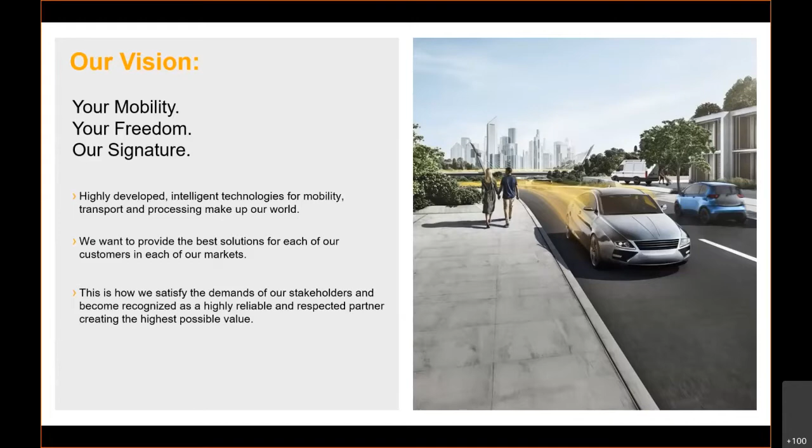I would like to start with Continental first. Continental has a vision: your mobility, your freedom, and our signature. Highly developed intelligent technologies for mobility, transport, and processing make up the world. We want to provide the best solution for each of our customers in each of our markets, and this is how we satisfy the demand of our stakeholders and become recognized as a highly reliable and respected partner, creating the highest possible value. That is our vision.

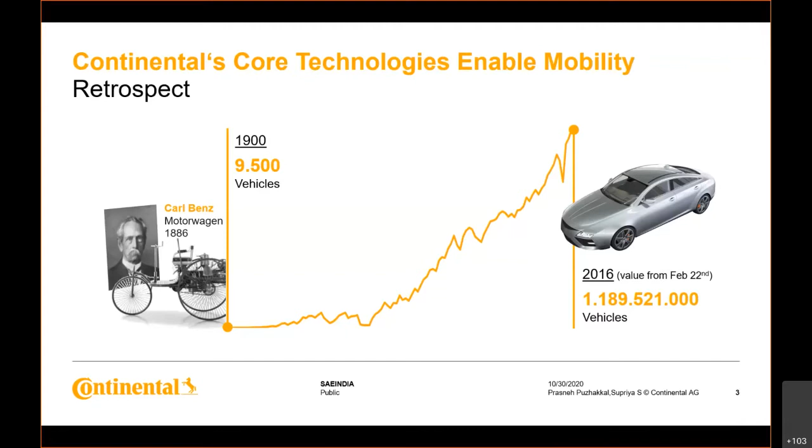Let us look into Continental's core technologies enabling mobility, with a short retrospect. From 1886 to 2016 - 1886 was the first motor wagon, the first car produced by Carl Benz. In 1900 there were only 9,500 vehicles all over the world. Now in 2016, you can see the numbers here. So we could say individual mobility is a success story.

Let us see whether individual mobility will be a success for the future. What are the pros and cons? The pros: we have fun in driving, we have private space - especially in the time of Corona, we don't want social contact, so it ensures a private space. It ensures the freedom to drive. What are the cons? Pollution is one biggest problem. Boredom is a problem, waste of time, stress, crashes.

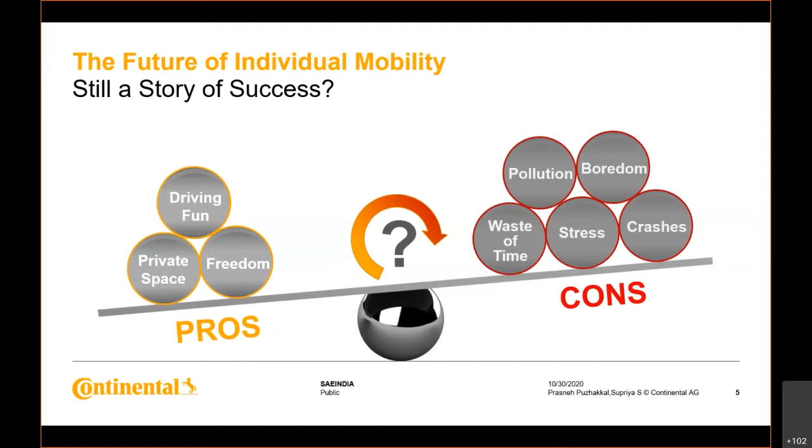So now we are talking more about safety. Let us talk about the crashes. The future of individual mobility can be a success story by looking into these figures: 1.25 million traffic accident fatalities worldwide, and it is expected to increase. The United Nations goal of the decade of road safety is to save 5 million lives, and this is what we are going ahead with.

So there is a motivation behind moving for the safety system. We have to reduce these fatalities for the future.

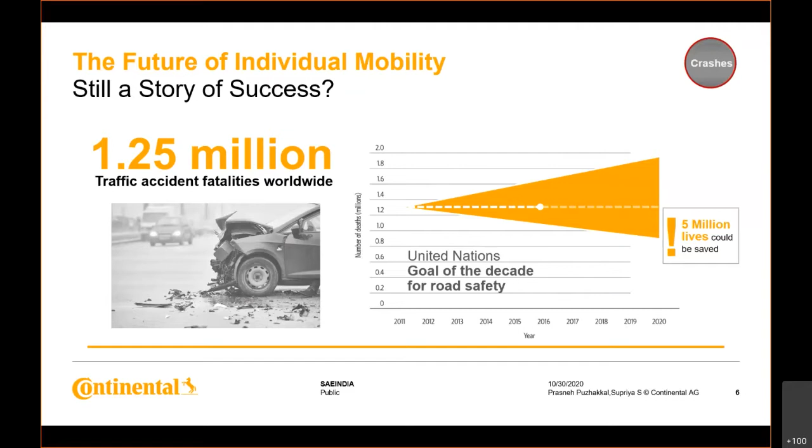Let's talk about safety - reduce the number of fatalities and those injured. 1.25 million people die in road accidents every year, and a further 50 million are getting injured. When you look into 9.3, 19.9, 17.3 - these are the statistics from all the worldwide regions.

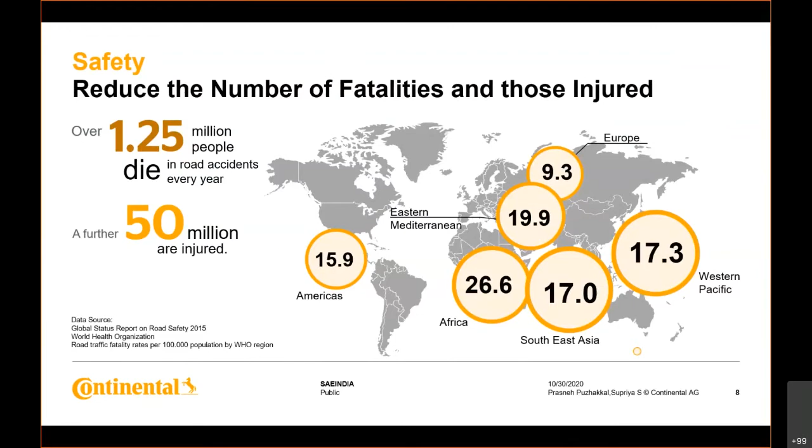Now, safe mobility - what could be the crash causes? 95% of all road accidents involve some human error. In 76% of the cases the human is solely to blame, misjudging driving dynamics and weather 50%. Distraction constitutes 38%, 39% of passenger vehicles, and 26% of trucks do not activate brakes before a collision. Some 40% more do not brake effectively. The main underlying causes could be alcohol, inexperience, tiredness - all caused by people not being experienced in how to drive on the road.

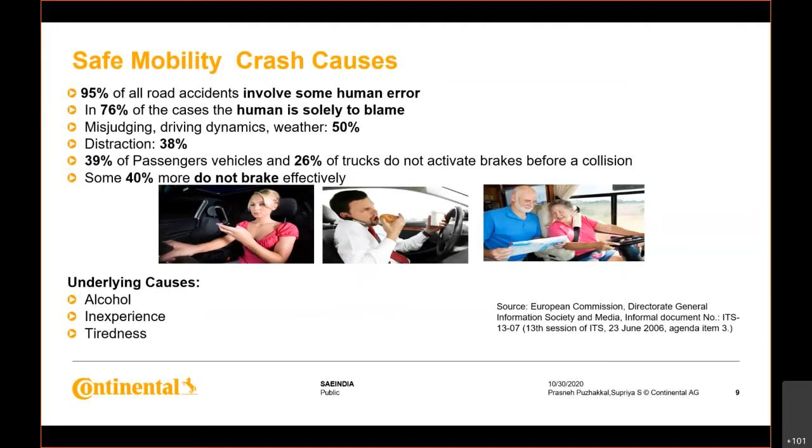So how can we handle it? How to bring down traffic fatalities? We have 4E: education, enforcement, engineering, and environment. We are into engineering, so we have to find solutions in engineering - we will focus on engineering.

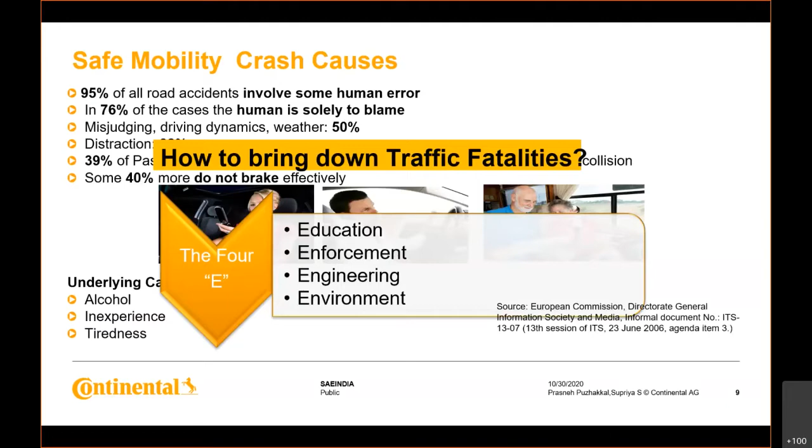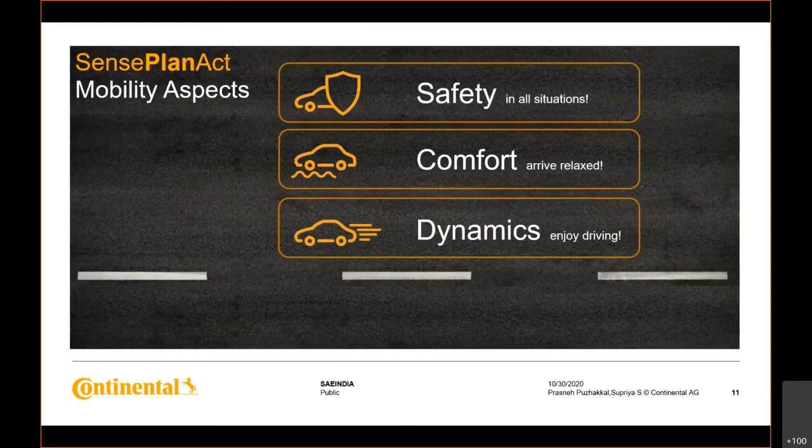Let us get into a broad picture of mobility. Mobility has different aspects: safety, comfort, and dynamics. Safety is in all situations, comfort is arrive relaxed, and we enjoy the driving by the vehicle dynamics. We achieve the safety aspects by sense, plan, and act - that is, sense the environment, plan the action, and act by using the car's control.

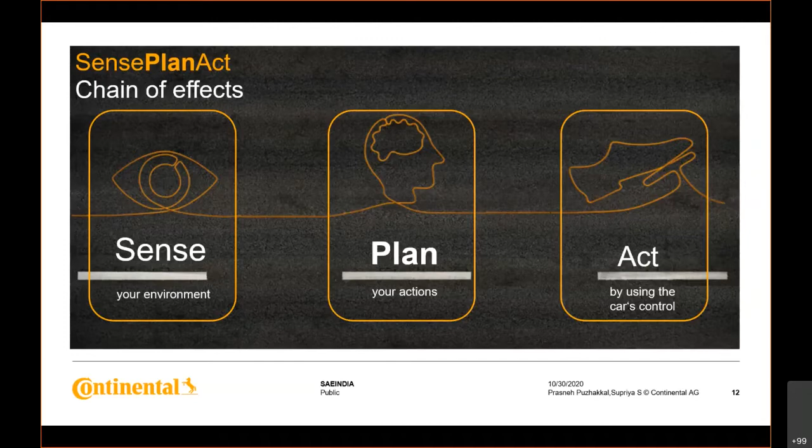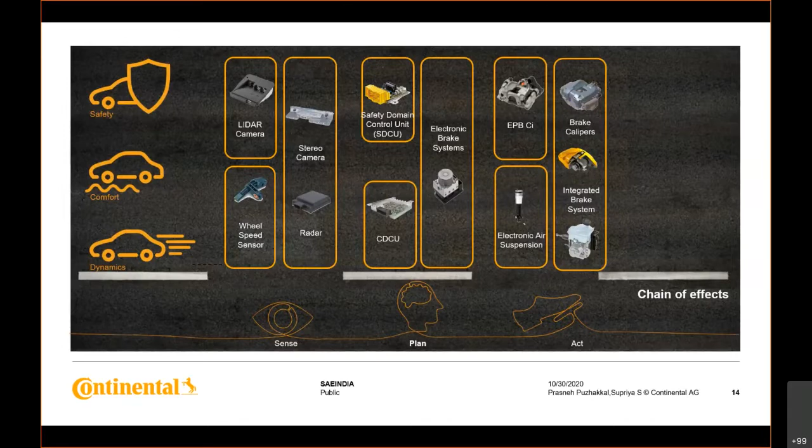These are the products: for sensing we use sensors, we plan with controllers, and we act with actuators. To take an example, for safety: emergency brake assist or electronic brake system, adaptive cruise control for comfort, and torque vectoring for dynamics.

Now we see that safety is an important part, and safety has its own place for the future. As a product company, our product development has to follow the state of the art - and how we follow the state of the art...

What is our motivation for product safety? Product safety has always been an important topic, not just now, even before. There are the Act on Liability for Defective Products, the Product Liability Act, the Act on Making Products Available on the Market, so Product Safety Acts have been there for many years. Now, together, product safety, the standards, we have to adhere to the standards related to the design and manufacturing of the products to ensure they do not cause harm or hazards to the customers.

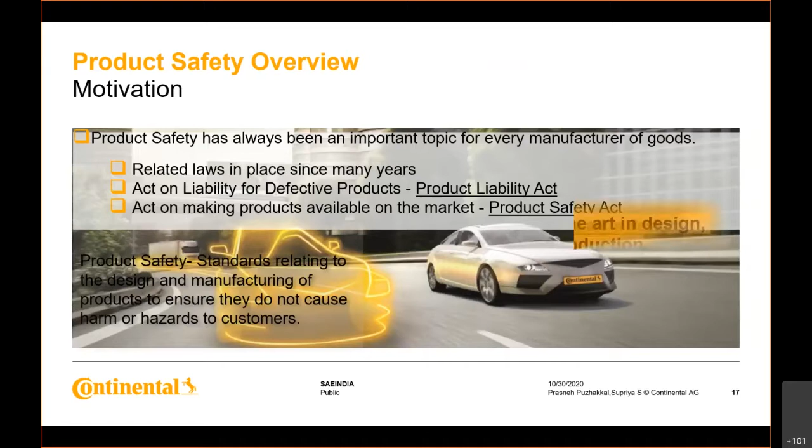And how to achieve it, and what is the new standard that we had to align our architecture with? That is the state of the art ISO 26262, which defines the process, defines the architecture, and defines the method of how to achieve it.

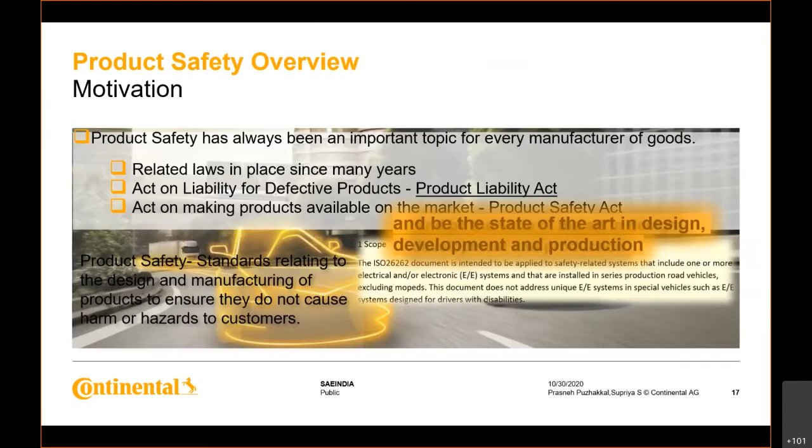Let us know the standard ISO 26262. So Supriya will take you through the structure and the standard of ISO 26262. Yes, thank you, Prasneh.

So, a small overview on the ISO 26262. Officially, the ISO 26262 was first released in November 2011, and later we had a second update in 2018. ISO 26262 was derived from IEC 61508, which is a mother standard for all functional safety, and we have adapted it to our automotive needs, wherein we have it for the transportation domain, mass production, and distributed developments. For the representation of the state of the art, we have to follow national or international norms in order to implement the best technical solution.

And this is applicable for the series production of passenger cars of all weights, trucks and buses, and motorcycles. We also have it applicable for safety-related systems and electrical or electronic systems onboard the vehicles, including their embedded software.

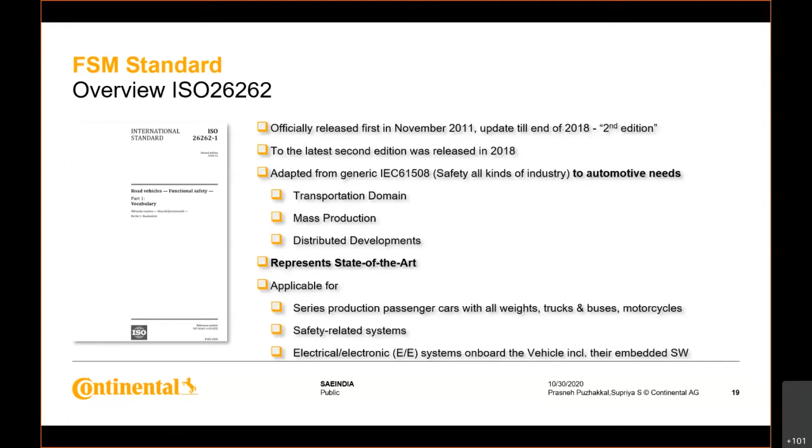Moving on, these are the parts of the ISO 26262. Initially, in the first version, we had 10 parts, but now in the recent 2018 updated version, we have 12 parts, wherein the first part is about vocabulary. Here in the vocabulary, all the terminologies mentioned in all the parts, the meaning of that will be present. Part 2 describes the management activities of functional safety, and part 3 we have the concept phase.

Later we move on to the development phase from part 4, wherein part 4 is for development at the system level, then part 5 we move on to the hardware level, and part 6 again we have the development at the software level.

Then after this we move on to production, that is part 7, and in part 8 we have the supporting processes, and part 9 is about the ASIL oriented and safety oriented analysis. Part 10 we have guidelines on ISO 26262, and part 11 is the guidelines for ISO 26262 applied to semiconductors, and for part 12 we have the adaptation to motorcycles.

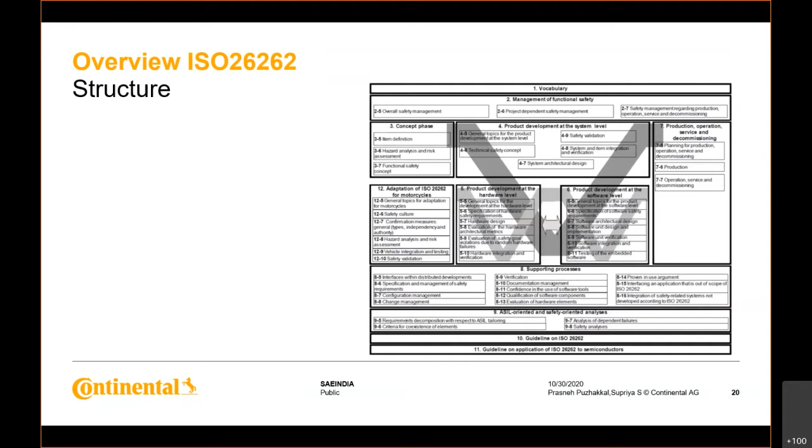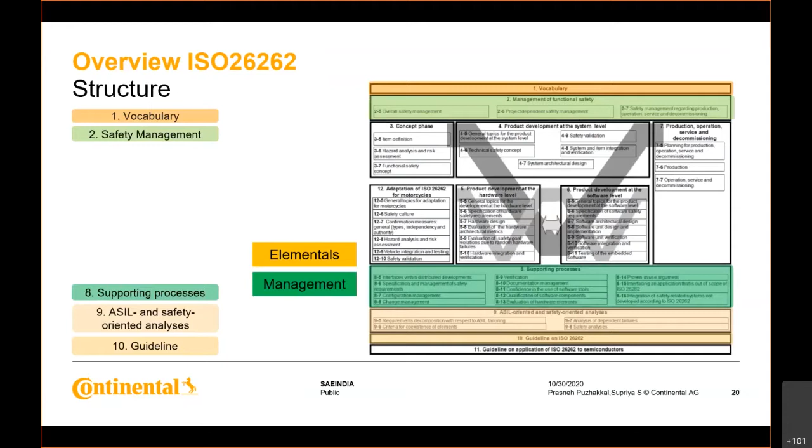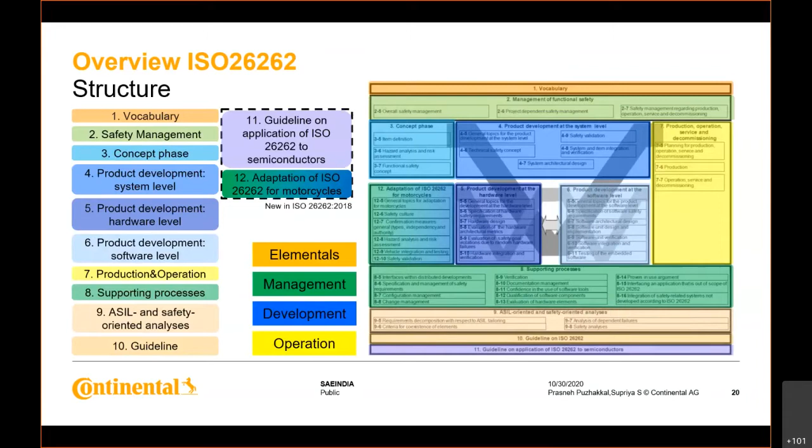So under the elementals we have part 1, part 9, and part 10. Under the management activities we have part 2 and part 8. Next, for the development activities we have parts 3, 4, 5, 6, 11, and 12. And next for the operation we have part 7. So in the new edition of the ISO 26262, as I said, part 11 and part 12 were added. So this was a short overview on the ISO 26262.

So how are we adapting it to the V model? Prasneh will be taking us through. Okay, so we do have our conventional development, and as Rani mentioned at the time of introduction, we have to incorporate the safety cycle into the V model. It has to be integrated, then only could we make it possible. We cannot go in parallel. So let us go and see how the safety cycle has been placed.

Okay, so what is the safety life cycle? ISO 26262 defines planning, methods, technical design, processes, and culture. Then it has to be integrated into requirements and architecture, then safety analysis and test. So basically, we have to do a good adaptation of methods, process, tools, and work products.

So going to the safety cycle: we have the item definition, then hazard analysis, and deriving a functional safety concept at the concept phase. Then we have product development, the planning of the system technically, developing the system technically, planning for that, and also developing the components for the system, integrating, testing, and releasing for production. And after SOP, that's production, operation, service, and decommissioning. So this is an overall view of the safety cycle.

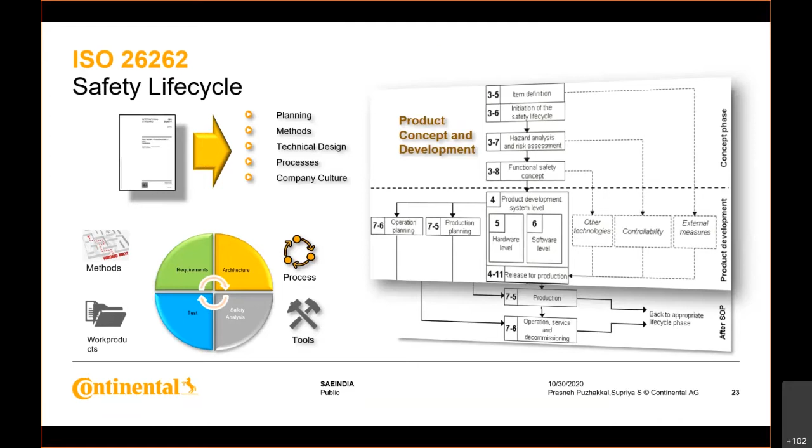So now we do have two things: one is production and one is development. So let us just first focus on development, so product concept and development. We would like to integrate this into our normal development model. So if you want to make a company culture which could adhere to functional safety, definitely we have to take this cycle and make it an integral part of our development, which we cannot differentiate, so we don't run parallel processes for functional safety and for the development.

So let us look at FSM in the V cycle and FSM and systems engineering. Let's just look into the basic aspects of systems engineering. Systems engineering is a domain which defines systematic approaches for the development of complex systems and addresses all aspects of a system within its life cycle. The V model was published in 1979, mainly motivated by software development, and it defines the development phases. I hope everybody is aware of it. And functional safety requires a systematic approach of development to mitigate the risk.

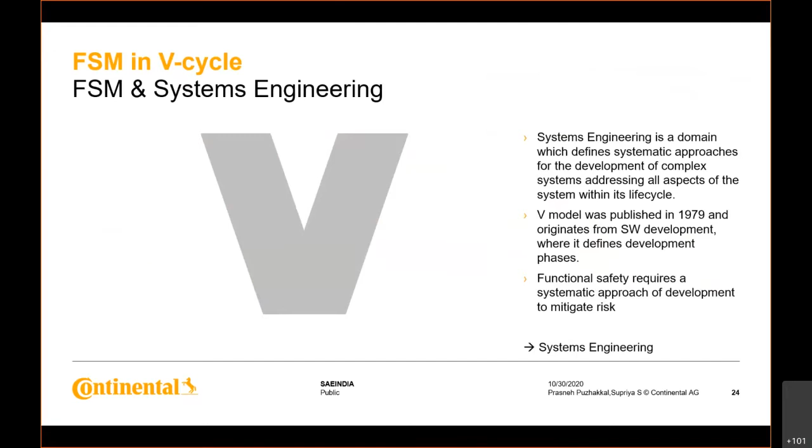So let's see. On the bottom x-axis is the time, and on the y-axis is the development from the components, and the components are integrated to become a system. The system is integrated into the vehicle. So we have requirements flowing from the vehicle level towards the component, and we implement the component, integrate, test, and validate up to the vehicle level. So this is, in simple terms, what is going on.

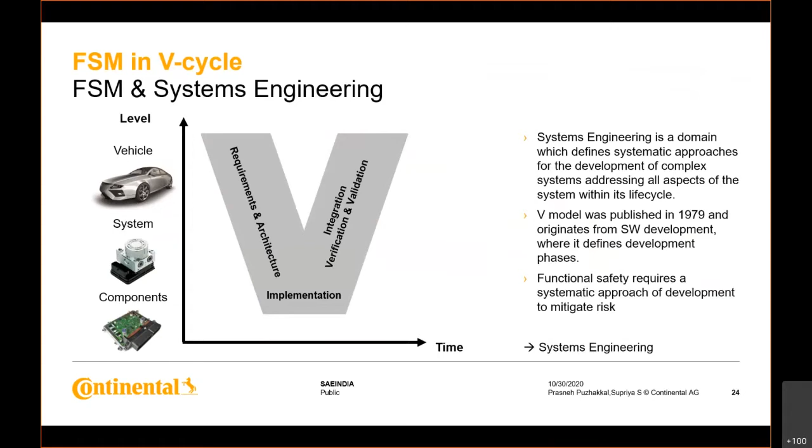So let us see what is a normal process of system development. We have item definition; we define the item for the system. Then we derive the functional requirements. Then we make the functional architecture. Then the project plan. Once the functional architecture and requirements are clear and aligned to the vehicle architecture, we could start our system development by planning.

Then we make technical requirements, then go to the system architecture, then requirements for the components and architecture for the components, defining the test concept at all levels, then executing the tests at component level and system level, and completing this V model. So what is the difference when we integrate functional safety?

When we integrate functional safety, we have a development interface agreement, that is, the supplier and the OEM agree that we have to adhere to functional safety. And we agree by evidencing the compliance, giving the work products at each phase. Which work products have to be made is clearly defined and agreed between both parties. Then we do an impact analysis. There are system requirements, functional requirements which have come that have to be realized against a product. Then we do the risk analysis.

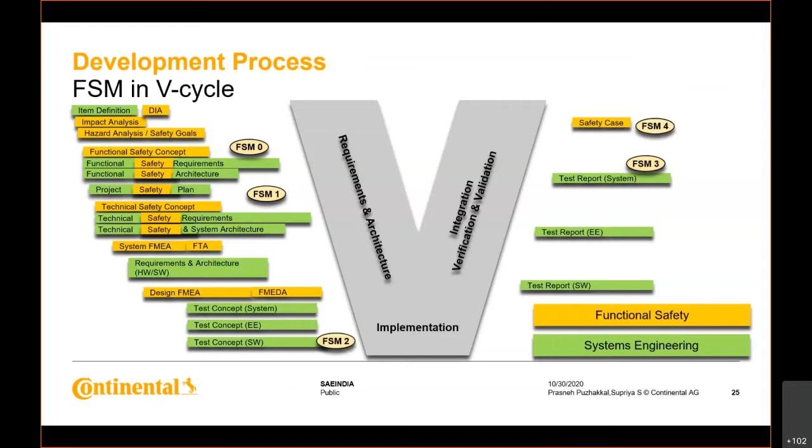After this, let us start defining boundaries and entering into an agreement between the supplier and the OEM. So let us say define an item. Item definition defines and describes the item, its dependencies on, and interaction with the environment and other items. It supports an adequate understanding of the item so that the activities in subsequent phases can be performed. So who is responsible? The system requirements engineer, supported by the system architect, and the information could be shared by the safety manager.

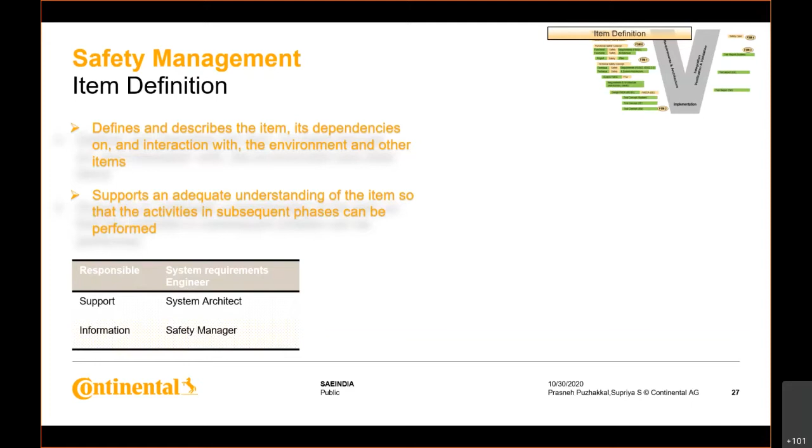Just giving an example of a small item definition. So it's an electronic brake system. We have actuations, power supply, combustion, all the environments there. We have a wheel speed sensor input, wheel brake outputs. So a kind of small example of the item definition. Now we have to enter into the development interface agreement with the customer. Supriya will be explaining it in a detailed way.

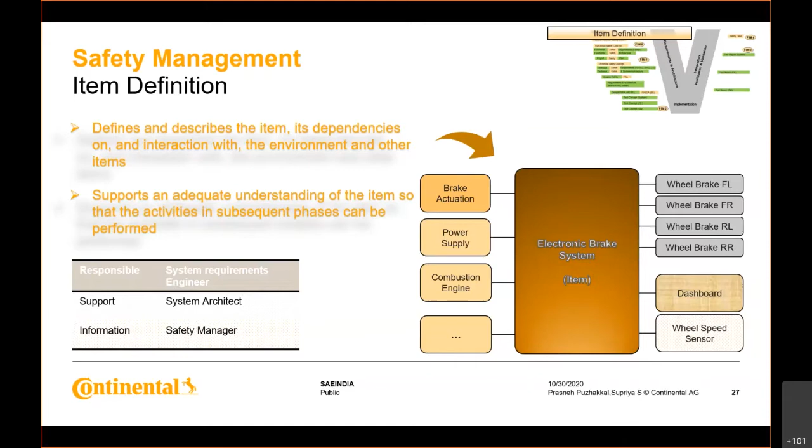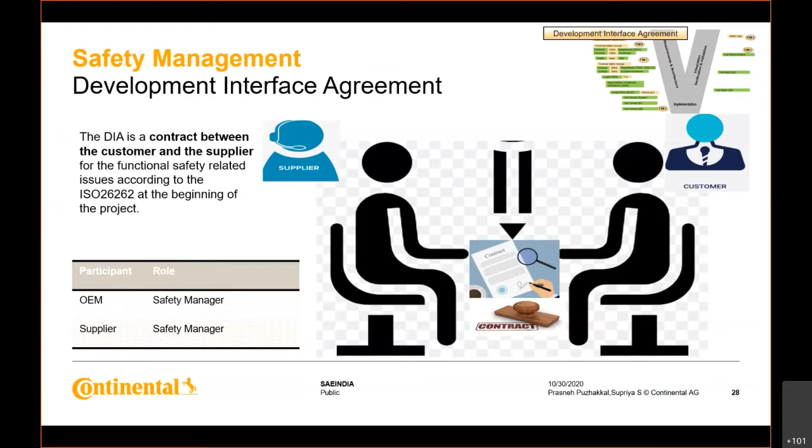Okay, so now that we have our item definition ready, we'll be moving on to the development interface agreement. As the name itself says, it is an agreement or a contract made between two parties. Now, who are these two parties? The OEM and the supplier. The safety manager from the OEM and the safety manager from the supplier sit together, discuss, and come to an agreement on what has to be done. Now, what is inside the development interface agreement?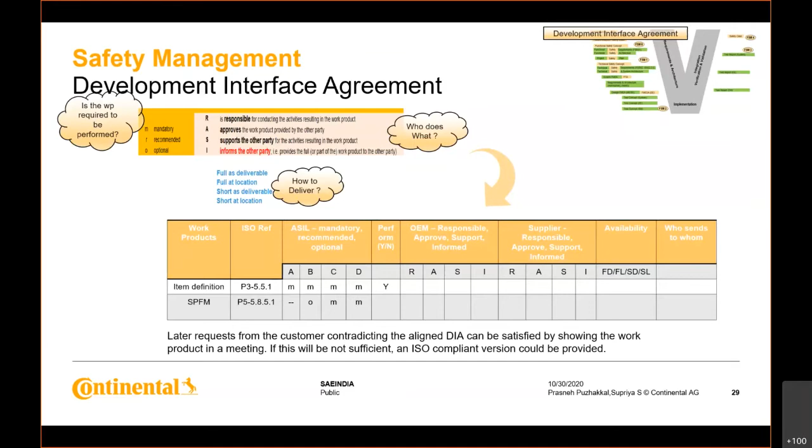And who sends to whom, in the last, you have to mention it. This will usually be the responsible person who will be sending it to the person who is going to approve it. So this is what is present in the development interface agreement. So next, about the impact analysis, Prasneh will be taking you through.

So the impact analysis. The main thing is whether the function or the system requirements of the item can meet the product requirements. Just to give an example, if there is a special interface requirement to a sensor which could be fulfilled by the product to achieve a safety functionality, this could be one of the items which is there as a new requirement. So whether it can be feasible inside the product requirements. So this is the main target for the impact analysis.

So who is responsible for the impact analysis? The function integration manager, it can be named in different ways, the system requirements engineer and the product manager. The functions integration manager is responsible to check the impact on the functions, the functional requirements which are fulfilled by the product. Then the system requirements engineer is responsible for the system architecture, whether it could receive, and the product manager, and it is supported by hardware, software, and safety engineers.

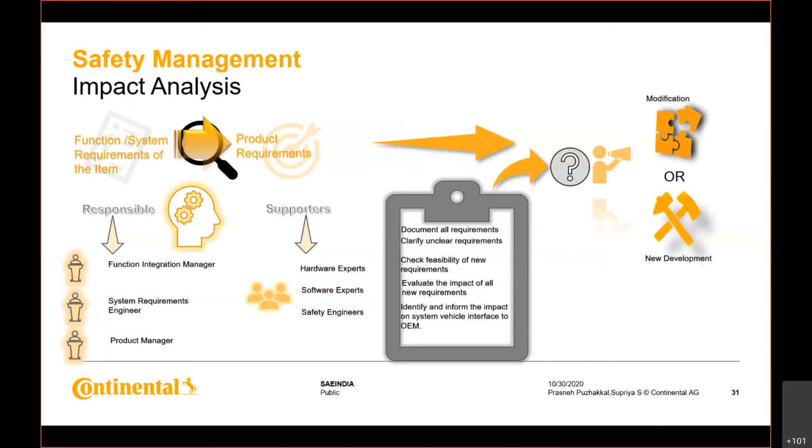And once we finish the condition that we could modify, or we could go for a new development, then we check regarding the functional requirements and we do the risk analysis of the functional requirements. And this will be taken by Supriya.

So now that we have the item definition, the hazard analysis and risk assessment will be performed on the vehicle level. After the hazard analysis and risk assessment is performed, the output of the HARA is the safety goals, or the top level safety requirements will be derived out of the HARA, and then we will be assigning ASIL ratings to all the safety goals. Again, here the responsible people are the safety managers from both the OEM side and the supplier side.

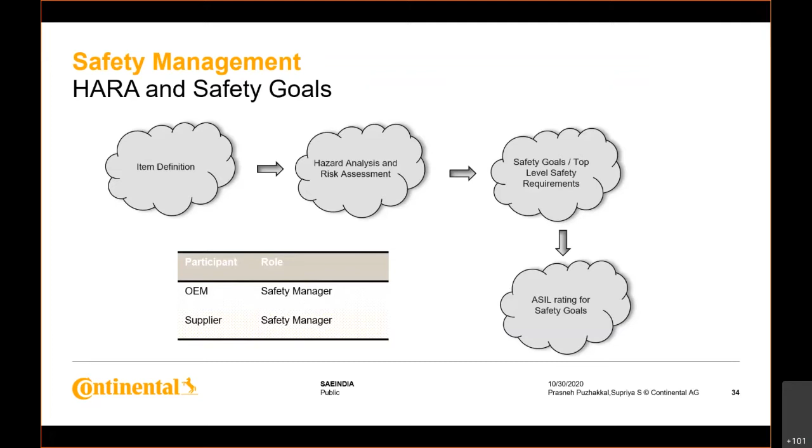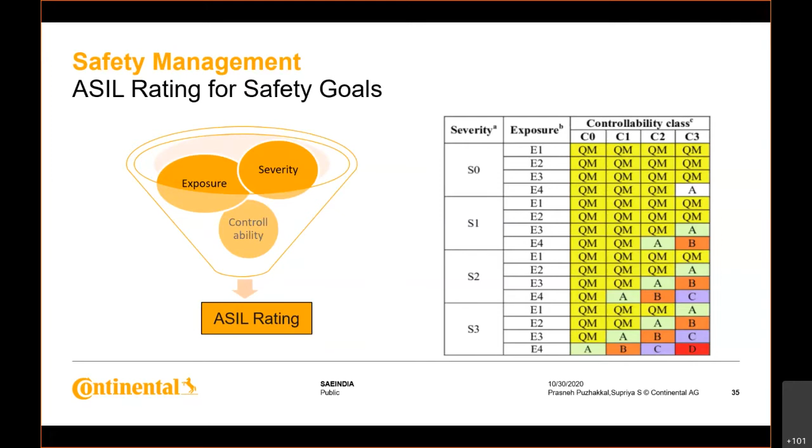So now how are we going to assign the ASIL levels? We have three parameters here, that is the severity, exposure and controllability. All the tables for these three parameters are present in part 3 of the ISO 26262. So based on these three parameters, we go to our ASIL table and, checking where it comes under, we derive our ASIL level for the particular safety goal. Moving to the next slide.

Now, as I said, the OEM and the supplier will again have to sit together for this safety goal alignment also. Usually the OEM has to perform the HARA on the vehicle level and send the safety goals to the supplier, wherein the supplier has to analyze it. But this is not the case most of the time. The OEM will ask the supplier to perform the hazard analysis most of the time, wherein the supplier will perform the HARA and the OEM will act as a supporting person.

Or there can be another case wherein the OEM has performed their HARA and has their safety goals, and the supplier has also performed HARA and has their safety goals. So in this case, both of the safety managers should sit together and map each and every safety goal and check if all the safety goals are covered and if all the ASIL levels are matching.

So we should make sure that the ASIL levels are matching, and if there are some cases wherein the ASIL levels are not matching, then we have to decide what to do: either you have to change your ASIL levels, or you have to talk to your OEM and negotiate it. So these things you will discuss and you will agree upon what you are going to do.

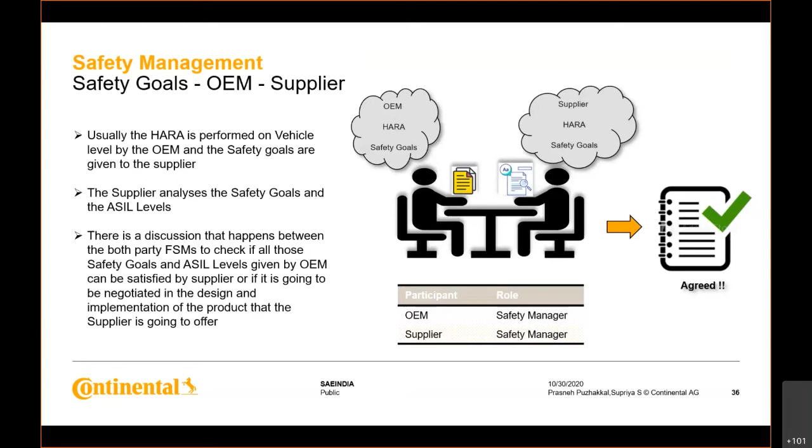So this was about the safety goals, and the functional safety concept will be taken through by Prasneh. So now that we know the safety goal at vehicle level, is our supplier-internal safety goal aligned to the OEM, or is there a need for a discussion or clarification? All these things have to be taken care of by defining the functional safety concept.

Just to give a very short picture, the results of the hazard analysis come as multiple safety goals. The safety goal is defined at vehicle level on some specific behavior, and all the functions which could contribute to that behavior are grouped towards that safety goal. And do all the functions meet the safety level which has been defined at the vehicle level risk analysis? This is exactly what the functional safety concept has to represent.

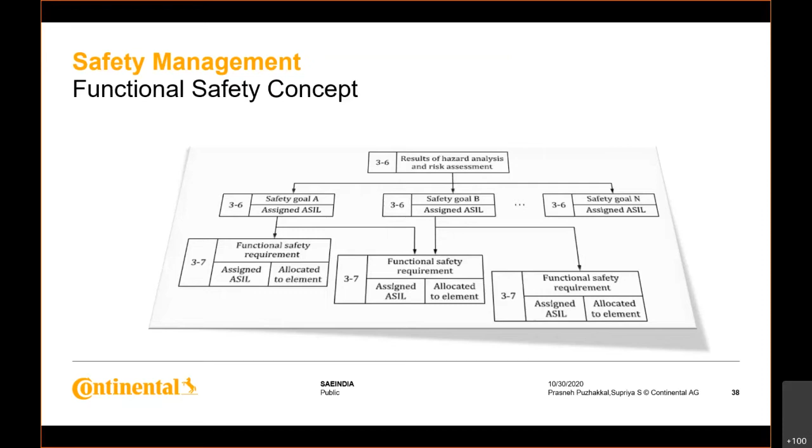So what is the objective? To derive the functional safety requirements from the safety goal, in line with the vehicle architecture, and to allocate the requirements to the preliminary architectural elements of the item or to an external measure. For example, a function has to be fulfilled using some kind of sensors. So it has to define which sensor, at which tolerance level or at which ASIL level of the signal, I expect to perform this function. Up to this elemental level, requirements have to be defined under the functional safety concept.

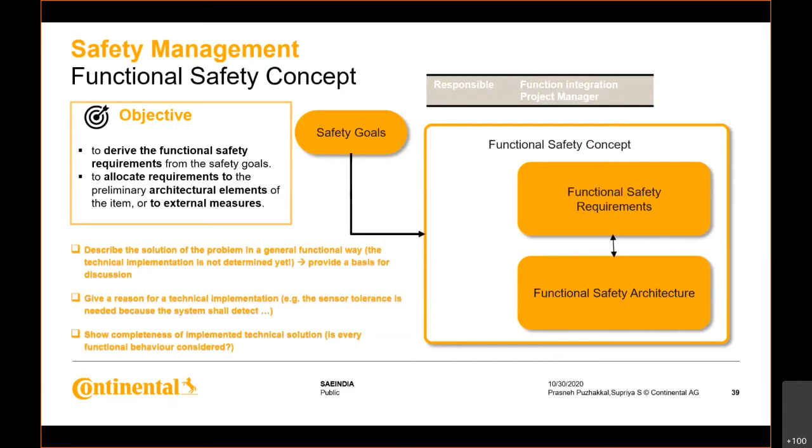So the safety goal is refined by the functional safety concept. The functional safety concept consists of functional safety requirements and functional safety architecture. And responsible for this is the function integration project manager. So there is an example which will be explained by Supriya.

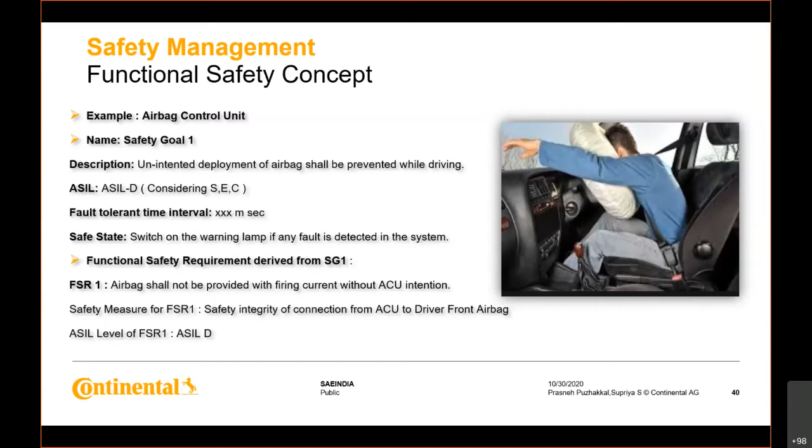And the ASIL level I have given for this functional safety requirement is ASIL D, because if this requirement is violated, it will directly violate my safety goal. That is why I've given the same ASIL level as that of the safety goal. Okay, so this was a small example. Now that we have our functional safety concept, we will move on to the planning phase of the functional safety activities.

So now, for deriving the project safety plan, we have to consider the inputs, that is the development interface agreement, the customer safety plan, and the project schedule. With these three work products in hand, the whole project team has to sit together: the project manager, the safety manager from quality, the requirements engineer, the hardware project manager, software project manager, the tester, and the function owners or function PMs.

And the functional safety manager has to sit together with them and decide, and they will come up with a project safety plan. This project safety plan will usually be present in your project plan.

If it is not present in the project plan and you are making it separately, then you have to reference this in your project plan. And the activities that are present in the safety plan can include the implementation of your project safety activities.

You have to define the tailoring activities, the supporting processes, the verification, validation. You have to mention your reviews, your audits, assessment, what are all the safety analyses that you're doing, what are the tools that you're using, and all the work products, and who is the person responsible to perform the work products. So all these things will be present in the project safety plan.

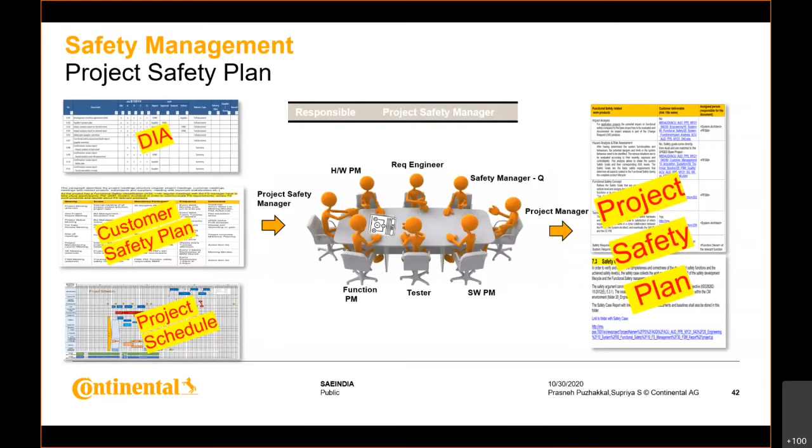Yeah, so moving on. The technical safety concept will be explained by Prasneh.

Safety concept of a special function. Say, for example, ABS. So, what are the signals needed for ABS? The function is defined by the functional safety concept. And what these signals have to fulfill and what the outcome towards the actuator has to fulfill inside the system has to be defined by the technical safety concept. And it has to be in line with the functional safety requirements. So functional safety requirements are refined by the technical safety concept, and it will also have technical safety requirements and technical safety architecture.

And one of the problems will be that this is a function. Say, for example, a function is realized by certain signals, and what realizes it is the system, and the inputs to realize that function may not be only from inside the system. They could be from outside the system.

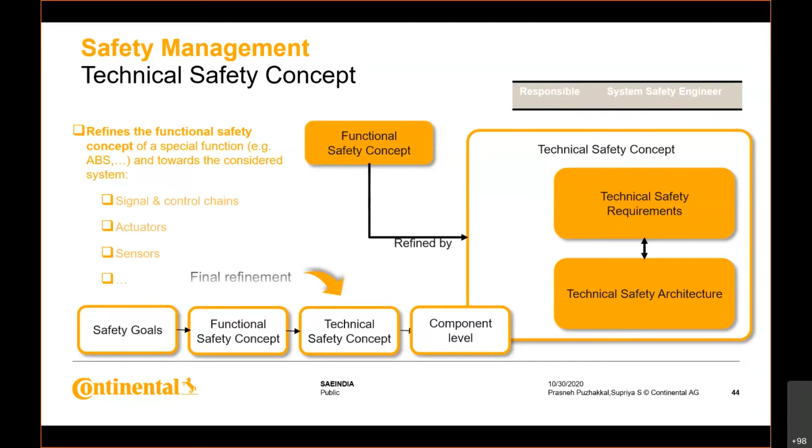I mean, safety goals, the final refinement should be safety goals, which constitute a safety concept, constitute a technical safety concept, constitute to the component level of the system. Arriving at a design concept and analyzing against safety metrics. So finally, we have a design concept available at the system level. And then we have to analyze it to meet the safety metrics. So we do the safety analysis for this.

The objective of a safety analysis is to avoid and control dangerous failures of safety-related control equipment. It is mainly performed at the system architecture level. So what has to be avoided and what has to be controlled? Avoid systematic failures. These can be due to the design, development process, and manufacturing process. So the design process, development process, and manufacturing process have to be aligned and strictly within the state of the art. So this is one thing that is checked to avoid systematic failure.

But controlling systematic failure during operation of the system is done by implementing technical measures during product development. For example, monitoring diagnostic functions, getting redundancy from hardware and software. All these things are taken care of. Defining the safety barrier before actuating a function. So all these things will be taken care of by the design.

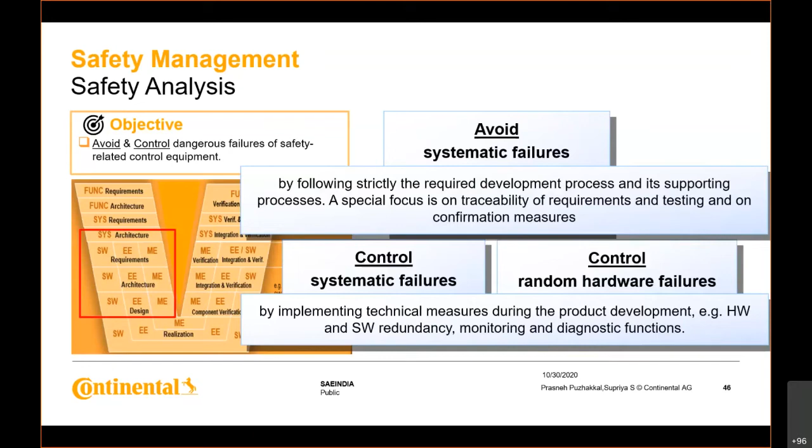And by doing this, with the architecture, we should be able to get some figures, like some FIT rate, some RPN values, all these things, that have to be analyzed, and it has to be checked whether the result of the analysis meets the ISO-defined safety metrics. So the detail as per ISO will be explained by Supriya. Over to you.

Okay, so as per ISO 26262, we have two safety analysis methods, and based on the ASIL level, it is described whether that particular analysis is recommended or not. So here, if we have a double plus, that means for that particular ASIL level, that analysis is highly recommended. If it is a single plus, then it is just recommended. And if it is an O, that means it has no recommendation.

So here we have the two analyses, that is the deductive analysis and the inductive analysis. As you can see, the inductive analysis is recommended for all the ASIL levels, whereas the deductive analysis is only highly recommended for ASIL C and D. The deductive analysis is a top-down approach wherein we know the effect and the cause is unknown. So we start from a safety goal for the fault tree analysis, and we dig down to the base events.

The inputs for this come from the concept phase - we give the FMEDA, and again the failure rate metrics from the FMEDA will be given to the fault analysis.

The second one is the inductive analysis, which is the bottom-up approach. Here we know the causes and the effect is unknown, so we go from the causes to the effects. From the system FMEA to the design FMEA, severity is the input, and from the design FMEA to the system FMEA, we take the occurrences.

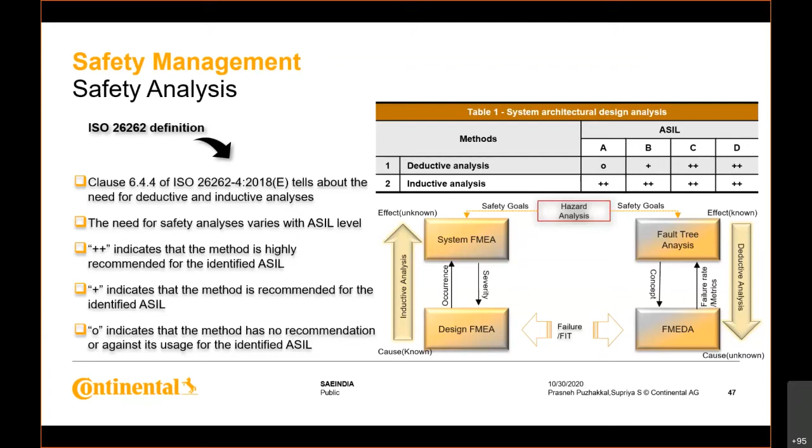Moving on - once we finish the design FMEA, we perform design level analysis and also system level analysis. Then the design is ready and implemented.

Then we have to go for the execution of test. The objective is to raise confidence in the implementation against safety requirements.

ISO recommends some test methods - what kinds of test have to be performed, which ASIL requires which test mandatorily, which ASIL doesn't require it, and in which environment the test has to be performed. So there are some recommendations.

With the recommendations and the available infrastructure and resources, we have to create the test method adhering to ISO. Then we make the plan, the design, test execution, and test completion.

Mainly we have three tests: engineering test, design validation test, and product validation. The engineering test is a kind of development test - it could be an iterative test, and the developer decides the test environment and test condition.

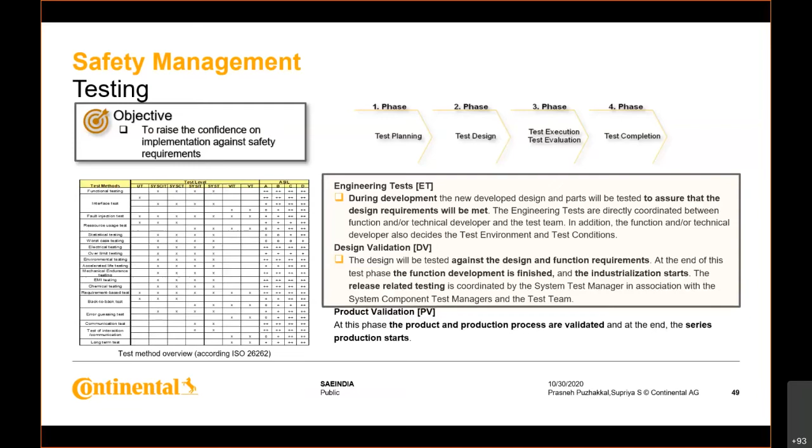Product validation is on the production process. So in the development phase, engineering test and design validation are performed.

We do test planning against the safety requirements. All the safety requirement tests are planned using a test method defined by ISO 26262. The test environment is defined - either vehicle test, HIL test, or SIL test - and then test reports are generated.

Finally, the right part of the V is finished. Now we are entering the last part of the FSM cycle, which is in development - so it is documenting.

So creation of the ISO 26262 conformal safety case. We have the work products which have been agreed in DIA, and we also have a clear project plan and milestones. With the help of both, we have executed the V cycle.

We have evidenced the work products related to each phase of development, and all the work products will be documented and linked in the safety case. Then finally the safety case document can be given to the OEM or the customer at the end of development.

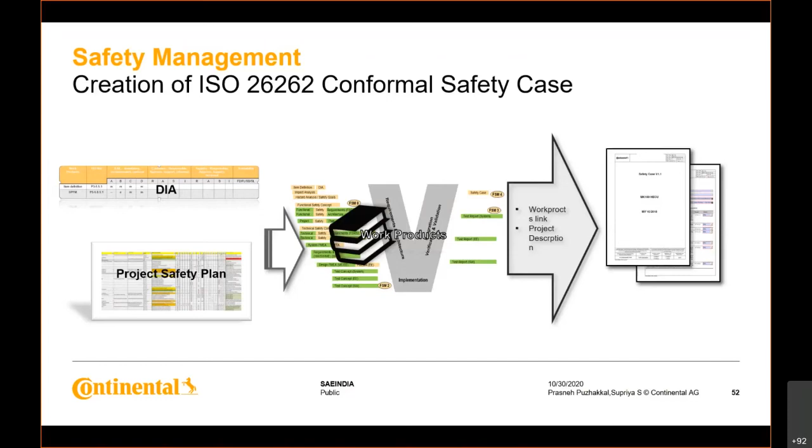Coming to the safety confirmation measures - we finished the V model. Now we also have to check whether we really adhered to ISO 26262 at each phase, not just making a final audit. So there are intermediate audits performed - also audits, reviews, or inspections performed in between, and this will be explained by Supriya.

The confirmation measures according to ISO 26262 are the reviews, the assessments, and the audits. The reviews are performed for every work product, and the assessments, as explained in the V cycle, we have periodically - so for every phase, depending upon project maturity, we perform the FSM 0 to FSM 4 assessments. The audit is usually performed at the end phase of the project, or if the customer requests, it can also be performed in between.

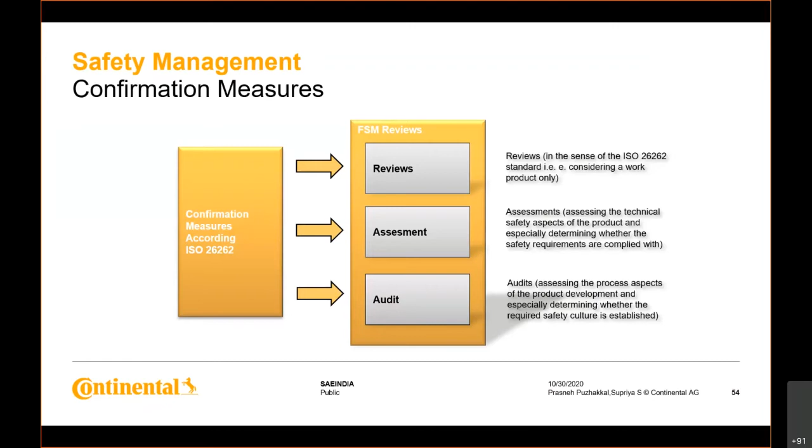Moving to the next slide - these are for the FSM reviews.

We perform periodic reviews for all the work products at different phases to check if the safety maturity is achieved or not. In this review, we check aspects like planning, execution, completeness, and correctness of the work products. This evaluation is based on methods and tools, and each review performed will have a checklist, with everything captured during the review documented neatly. The responsible person for these reviews will be the safety manager or the assessor.

So these are the different types of verification review methods. We have the screening method, walkthrough method, inspection method, and the formal verification method.

The screening method is recommended for ASIL A and QM. Here, a meeting may not be necessary; just a comment technique review method is present, wherein the person who has prepared the work product will mail it to the person who will be assessing it, and that person will check and mention some review comments and mail it back. So this is screening.

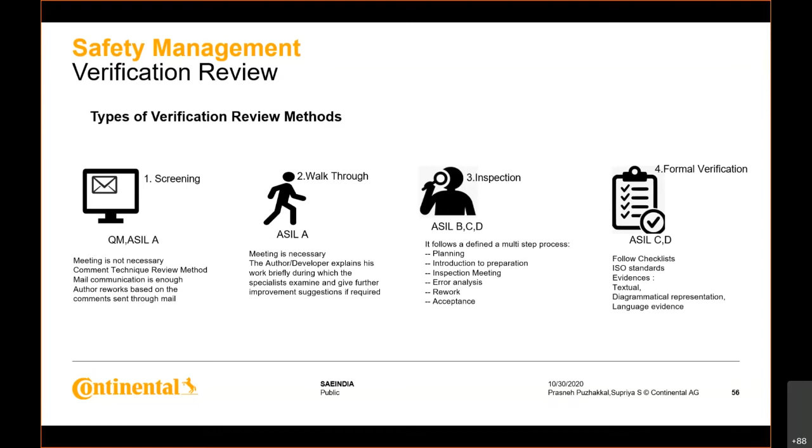Here we follow the checklist method, and everything is documented in checklists. According to ISO standards, we also have to present evidence which is textual, diagrammatical, or any other form of representation - we should be able to show it.

So moving on, the assessments will be explained by Prasneh.

Functional safety assessment is performed to check the correctness of execution at each and every phase of functional safety development. The FSM assessor shall be sufficiently trained and experienced with the product and applied technology and relevant requirements of the project being assessed. The FSM assessor shall also have a level of independence required by ISO 26262 depending on the ASIL classification of the safety goals subject to assessment. That means the FSM assessor should not be part of the development team.

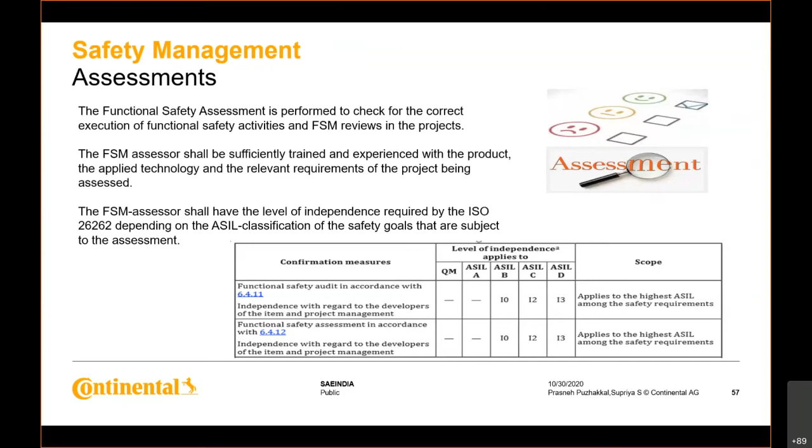So I will quickly go through the FSM assessment. We have already discussed that there are 5 levels of assessment: FSM 0 on the concept phase, FSM 1 on the design phase, FSM 2 on the test concept phase, FSM 3 on the validation phase, and FSM 4 on documentation of the complete safety requirements.

There are around 8 topics or areas that need to be assessed. The first is safety management, which comes mainly into the design phase - the application of the organization's safety culture and supporting processes is assessed here, including roles, responsibilities, and whether tailoring has been made or documented for the safety lifecycle. This is all related to process planning and the project safety plan.

Then safety activities during the concept phase - this is mainly the concept phase. When you see 0.1 and 0.2, that means 2 levels of assessment: 0.1 would be item definition and hazard analysis, and 0.2 could be the safety concept and functional safety concept. These can be merged into one assessment at FSM 0, or detailed further if the safety criticality of the system is high.

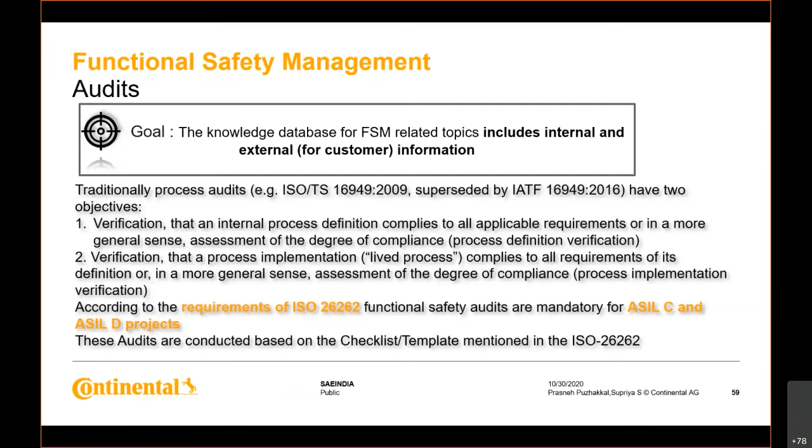Now, developing with qualified tools. We have to make sure that all the tools we are using in our project are qualified tools. So here we have tool classification and qualification. Firstly, we need to classify our tools, and after the classification, if required, the tool has to be qualified.

The tool classification includes three things: determination of the tool impact on the developed item, determination of tool error detection, and determination of the tool confidence level. After the classification, if the tool confidence level is greater than 1, then we need to qualify the tools.

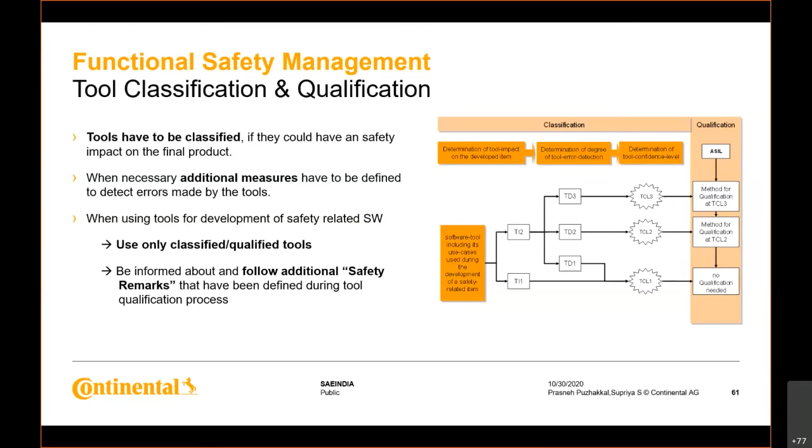This is for the tool impact and the tool error detection. For the tool impact, we are checking for the possibility of malfunction of the tool, wherein it can introduce errors or fail to detect errors. If there are no such possibilities in the tool, then we select it as TI1, and for all other cases it will be given as TI2.

Now going to tool error detection. If we have a high degree of confidence that malfunction is prevented by the tool, then we select TD1. If there is medium degree of confidence, then TD2 is selected, and in all other cases, TD3 is selected.

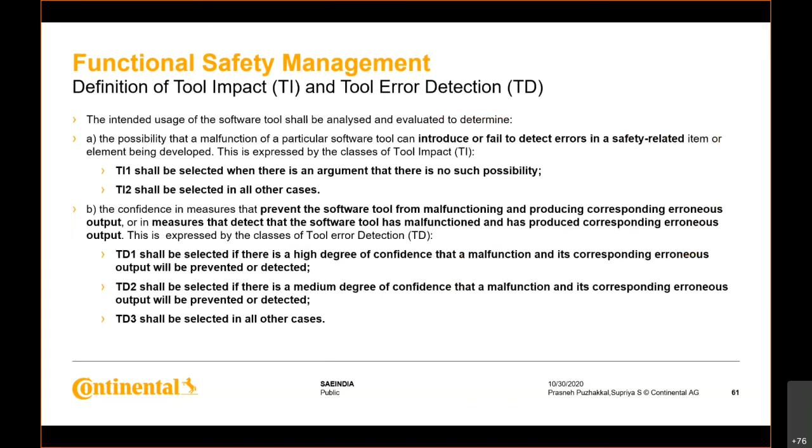This is the determination of the tool confidence level. Based on the TI and TD values, we check the tool confidence TCL value. For example, if my tool impact is TI1 and tool error detection is TD1, then it is given as TCL1. Otherwise, if it is TI2 and tool error detection is TD2, it is classified as TCL2. Or if tool impact is TI2 and tool error detection is TD3, it is taken as TCL3.

For TCL1, the tool qualification is not required. Only if the value of TCL is greater than 1, that is TCL2 and TCL3, is the tool qualification required. This is mentioned in Part 8 of the ISO 26262 methods, wherein the qualification of software tools for TCL3 and TCL2 is defined. These are the methods we have to follow according to ISO 26262 for the qualification of the tools.

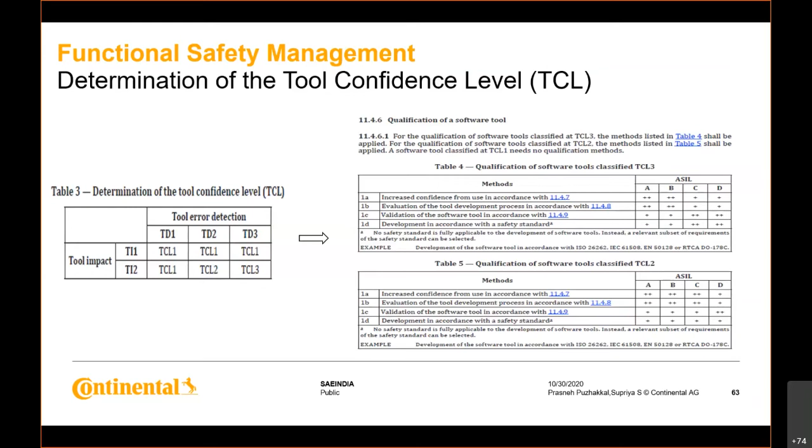So the FSM in production will be explained by Prasneh. Now we have completed the environment we used to develop—we completed the V cycle and also the confirmation measures. So let's see that once the development is finished, production has to start. Production has some relation to this: FSM in production. Once we finish the product development, it goes for production.

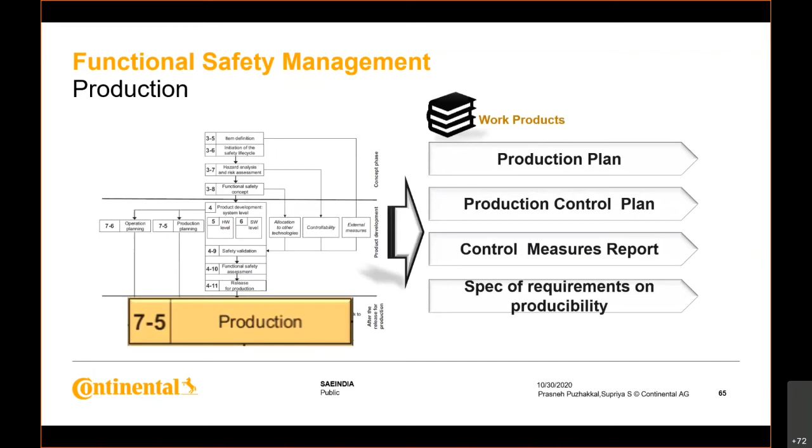So what are the main work products from production related to FSM? The main work products are: a production plan, production control plan, control measures report, specification of requirements on producibility, and assessment report on production capability.

So what is a production plan? It includes assembly instructions, work instructions, the skill set of the employees involved in producing a safety critical component, competency matrix, training matrix, traceability measures, and process failures and their effects—so PFMEA failures occurring during production. All these things are part of the production plan.

This also gets input from the development—I will explain that in the next slide. And the production control plan: this is just for controlling and making the plan, how many things have to be produced, which line has to start, and so on, to start making the safety critical product. The control measures report is a test report of these production control measures.

And spec of requirements on producibility. So this constitutes drawings, industrialization meetings, build quality report, the PFMEA; all these things are the spec for the producibility. So when you say spec for requirements of producibility, if you are just assembling a product inside the production plant, is the assembling of the component related to safety?

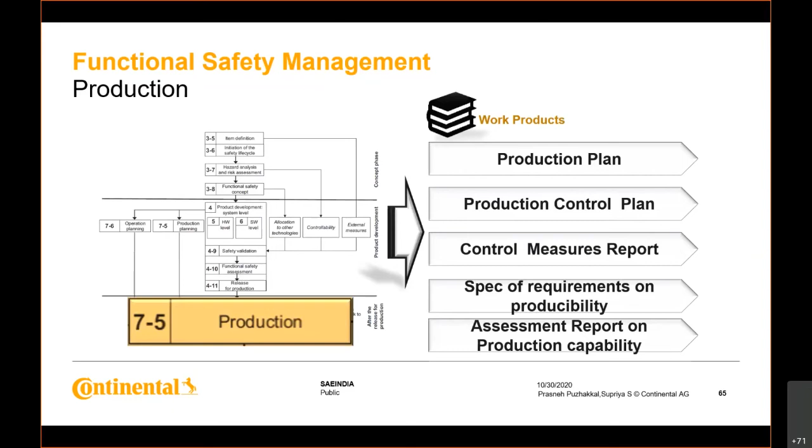And PPAP, the product validation part. So let us see development, production, and operation. I'll just make it short. From the development, we are doing FMEA. Just to give you an example, I think there are other special characteristics also. We are doing a system FMEA, a design FMEA, and finally we are getting into the metrics of the occurrence rate.

Occurrence can happen from that particular component, and occurrence means a failure occurrence. If a sensor is getting integrated into a system, there is a particular failure occurrence for that sensor. And if it is assembled into a system, there could also be a failure on the assembly side. So the failure possibility at the assembly plus the failure of that component give the total occurrence rate towards the system.

But if the criticality of that particular component is very high, mapped to a high severity safety level, then that severity from the top function level has to be cascaded to the system, to the component, and to the production. And the PFMEA has to adapt towards that. So the detection mechanism of a faulty assembly has to be ensured in the production line so that there is very little chance of a false assembly. This is how it is related, and this traceability has to be established in the production.

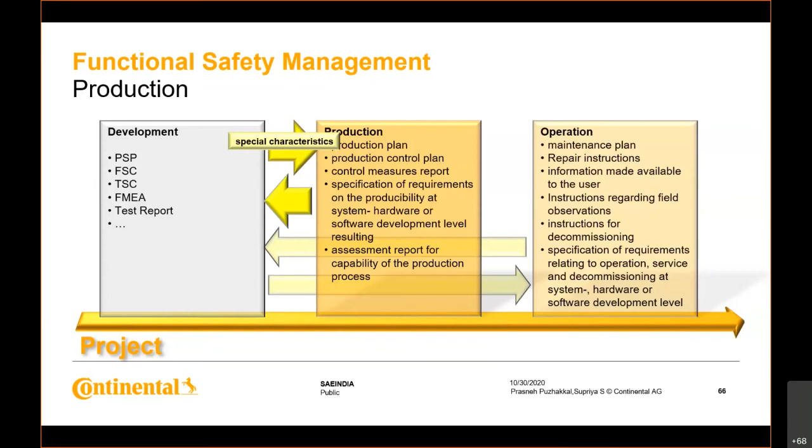So for the ISO, we have safety requirements, product drawings, DFMEA. We have special characteristics, which could be the severity cascaded from the top, giving to the assembly instructions, production plans, and the PFMEA as a spec. And then the final occurrence rate: even though we implement a lot of detection mechanisms and failure-free mechanisms, there is still a possibility of a failure. So that minor failure is also given back to the DFMEA and then to the system FMEA. I'm giving FMEA as a background, that's why I'm taking this example.

And this flow has to be ensured by the plant quality and the safety manager. They should have a reporting structure for optimizing the plan, and an escalation method established to adhere to functional safety. In case a higher FIT rate is identified at the plant, meaning the occurrence rate is high, there should be an escalation mechanism, shared and discussed with the development engineers. So all the analysis lessons learned should be shared with the safety analyst in the development team.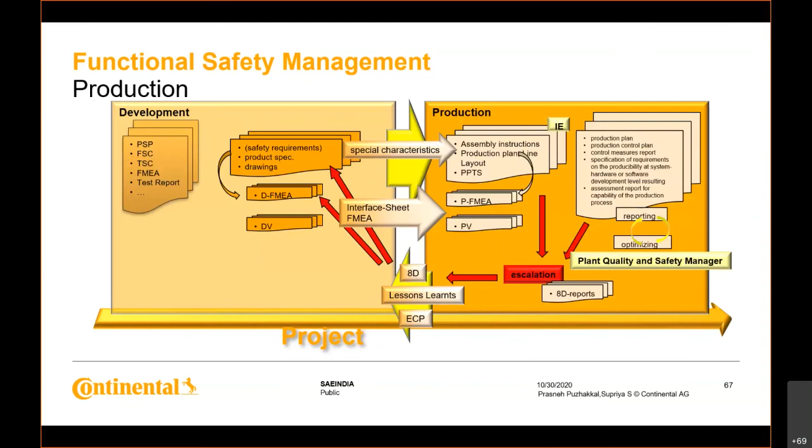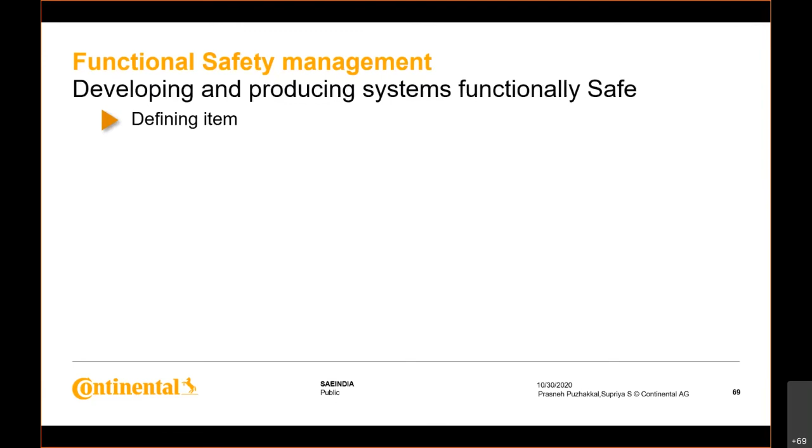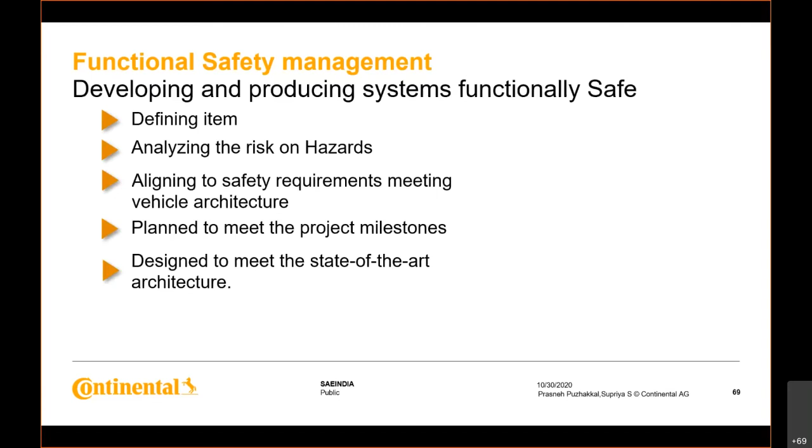And by doing all these things, we made it possible to develop a system which is functionally safe: by defining the system, analyzing the risks and hazards, aligning to safety requirements and meeting vehicle architecture, planning to meet the project milestones, designing to meet the state of the art architecture, testing without compromise, producing with quality and adhering to safety. So we made products functionally safe.

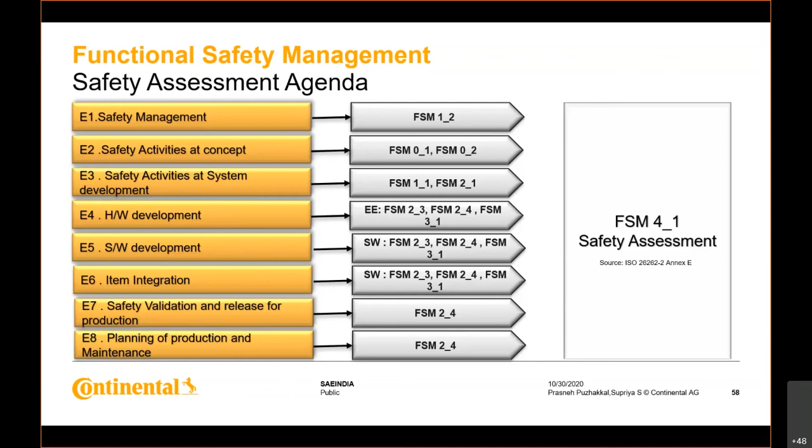No, I think, see. Why I'm asking this question: sometimes there will be duplication; you can do it in system test, sometimes in unit test. As a test architect, you plan some tests in the upper layer and some in the lower layer so that you don't duplicate a lot of effort. The question is more about how you plan that.

Since we integrated it inside the V model, as I started with, the test plan for this test method has been defined as an integral part of our process. Then we identify, for example, an interface test for a QM signal; we probably don't have to test it at vehicle level. But for example, the steering wheel angle sensor interface integration test to the electronic brake system is a very high integrity level component interface that we don't want to compromise, so we will mandatorily test it without any compromise.